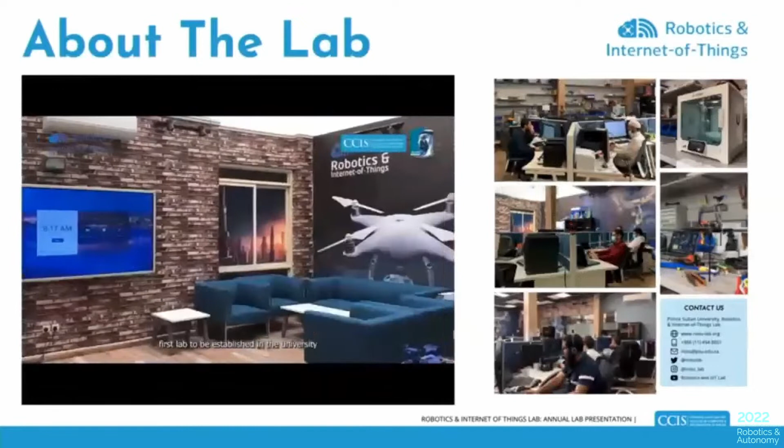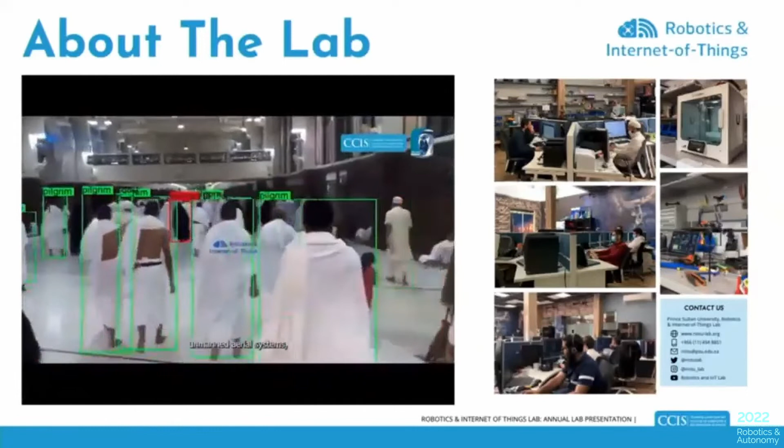So let me first give you a brief overview about the Robotics and Internet of Things Research Lab. The RIOTU Lab is the first research lab established at Prince Sultan University and currently has 15 full-time researchers with different backgrounds in computer science, software engineering, electrical engineering, and mechanical engineering, working on multidisciplinary areas including artificial intelligence, drones, mobile robots, Internet of Things applications, and emerging technologies.

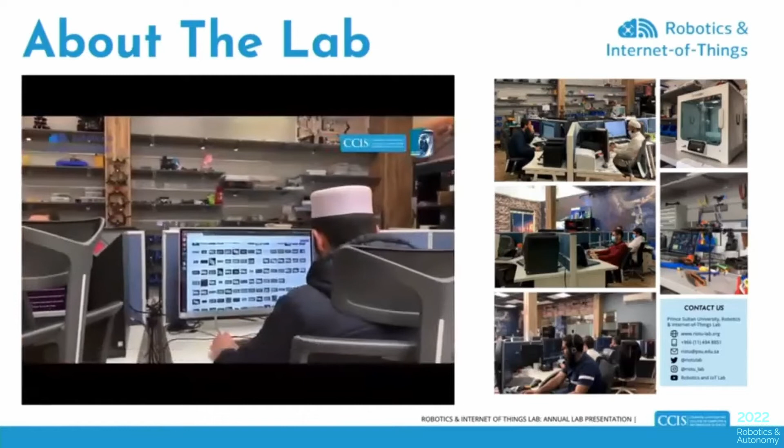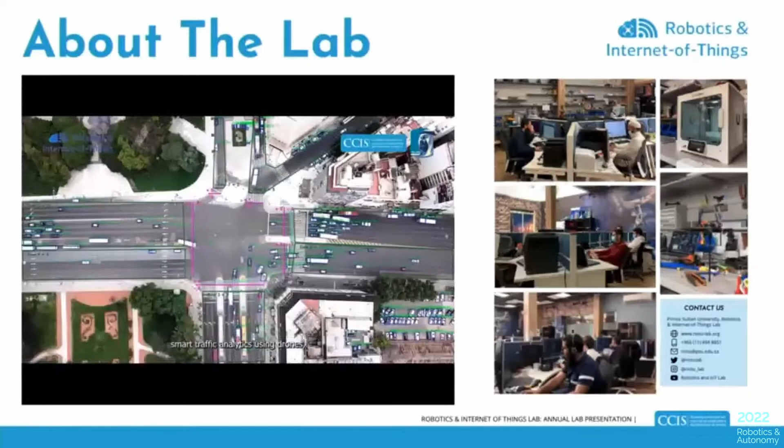The lab focuses both on academic research and also innovation. The research lab has contributed to several innovation projects, including the development of a drone delivery system, face recognition platform, vehicle identification and license plate recognition, telecommunication tower inspection, and others, which we will discuss in this presentation.

In this first part of the presentation, I will make an overview of the different applications that we have developed in the Robotics and Internet of Things Lab. Let me get started with the aerial survey applications.

As you can see from these slides, the global aerial imaging market size has been increasing since 2017, and it's forecasted that it will reach $4,125 million by the end of 2025. This makes a compound annual growth rate of 14% every year.

Here on the right side, you can see the distribution of the global aerial imaging market by drone platforms, as of 2017. You can see that fixed-wing aircraft are taking the largest share here, and in this case they will use vertical cameras. The second largest platform for aerial images are UAVs and drones, which are multi-rotor systems, with 45.7%. We also have helicopters with a small share here in green, and other types of platforms in red.

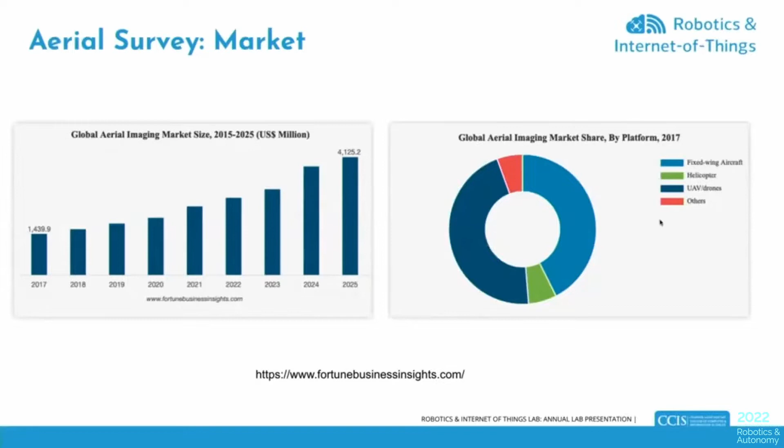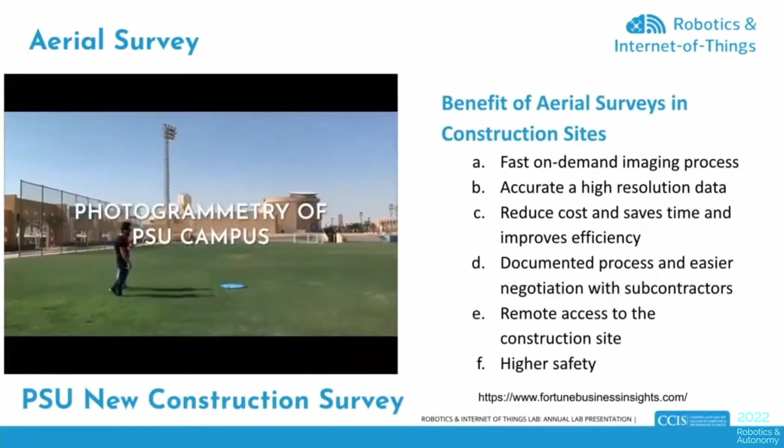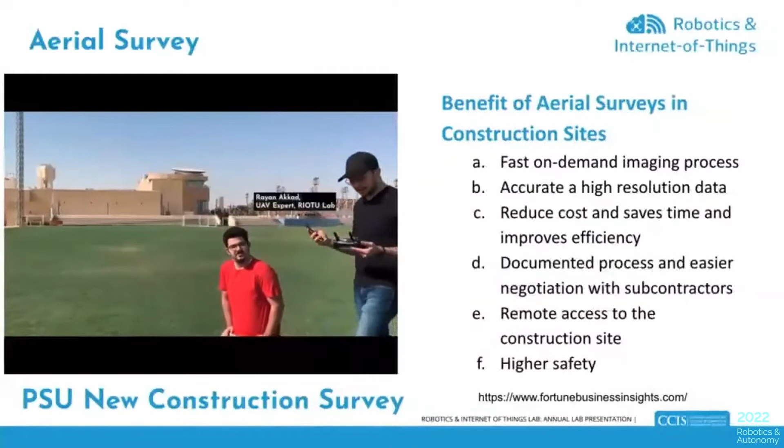So here in this slide, I'm going to take you through the different benefits of aerial surveys in construction sites. First, it provides a fast on-demand imaging process, so you can take a drone and collect images at any time for any area of interest. It provides accurate and high-resolution data because you can fly a drone at lower altitudes as compared, for example, to satellite images. It helps in reducing costs, saving time, and improving efficiency.

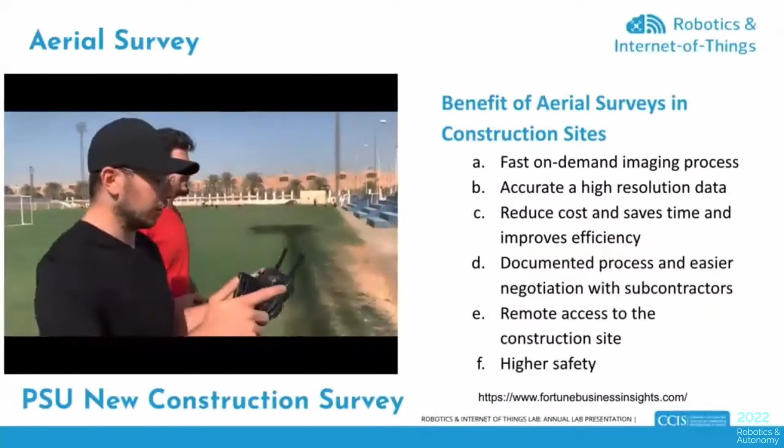For example, in this mission that we did to develop the 3D model and 2D model of the whole PSU campus, it just took 1 hour of flight to collect the data. And finally, you can get accurate, high-resolution data, as you can see here.

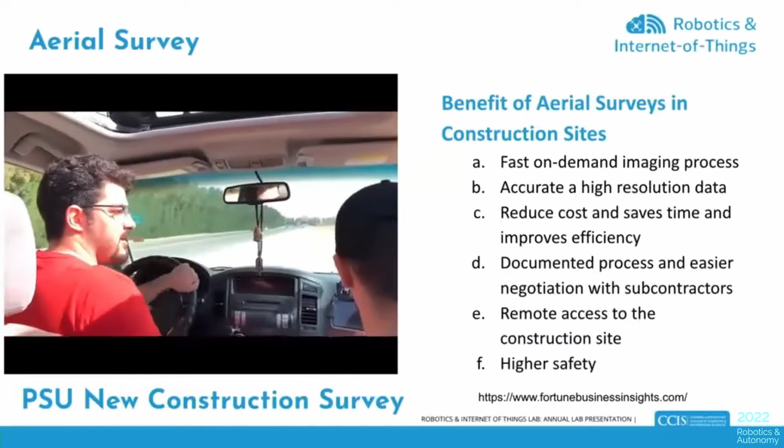Another benefit is that the whole process is documented, and it provides easier negotiation with subcontractors, especially if some companies would like to subcontract others to execute the aerial survey missions. It also provides remote access to the construction site, so you can visualize at any time the evolution of construction in a remote manner. Stakeholders do not need to move on site to check what is going on and what is the progress of the new construction building.

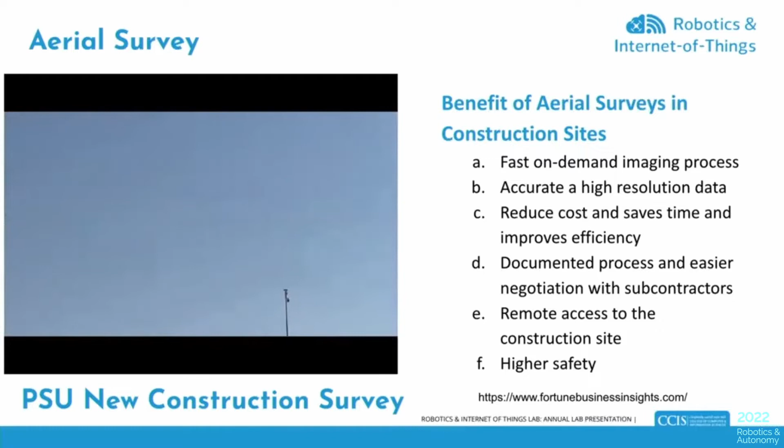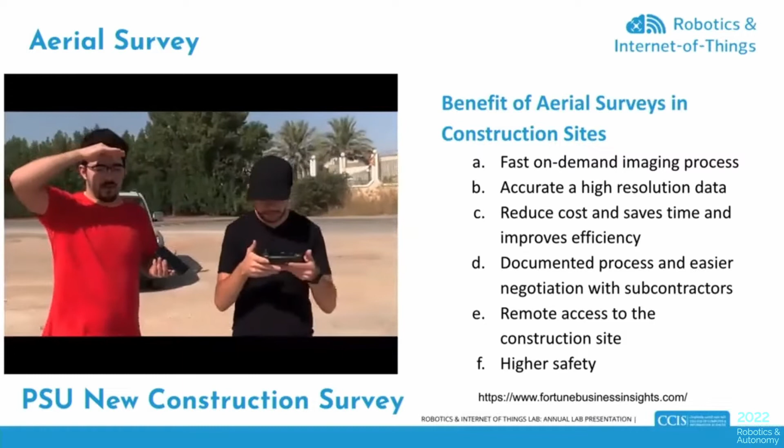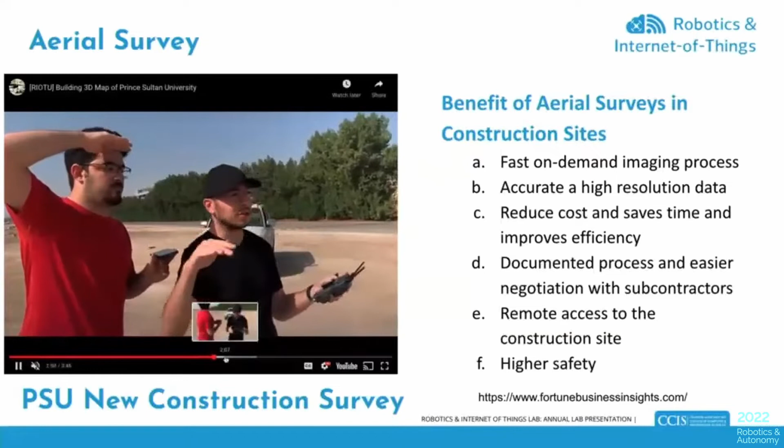In this mission, our drone pilot Ryan and Bilal Khawaf, one of the best graduate students very active in drones, conducted a survey of the whole PSU campus. We collected several images, a couple hundred depending on the resolution and accuracy required. The number of images collected depends from one mission to the other, and finally these images are processed by specialized software like Agisoft, Drone Deploy, or Pix4D.

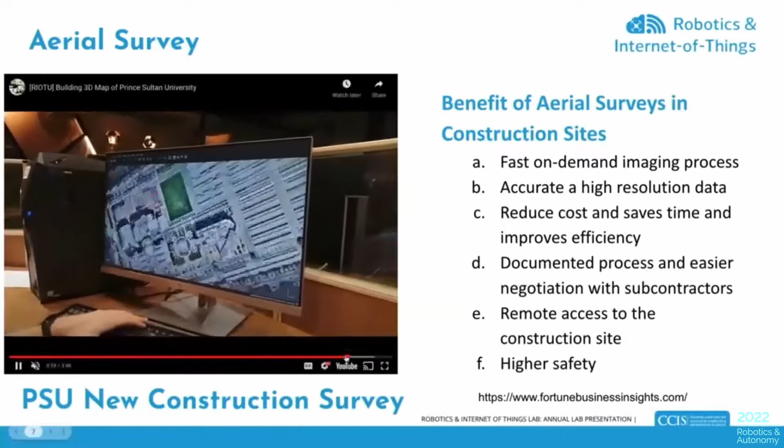This software generates high-resolution maps, either two-dimensional or three-dimensional models, as you can see here. This slide shows results from the survey mission of the new construction building, providing very high resolution. This 2D model was generated from an aerial survey mission, and in general the accuracy achieved can reach 2-3 centimeters horizontally and 5 to 6 centimeters vertically.

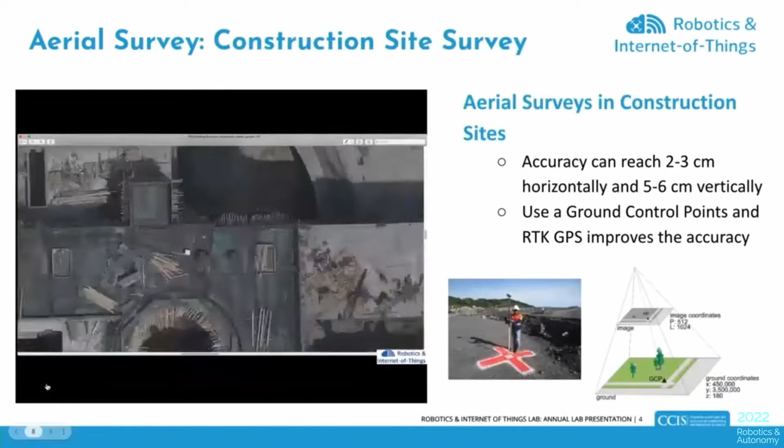So it's very high accuracy, and we can even increase the accuracy further. As you can see, we can see all the details, even small things on the ground, easily visible from this model. Now this is a three-dimensional model.

Using this three-dimensional model, we can do measurements of the surface or volume of a particular area. This can help, for example, in checking whether construction is compliant with the planning done in advance. The accuracy can be improved further by using ground control points, which are landmarks placed on the ground with known GPS locations.

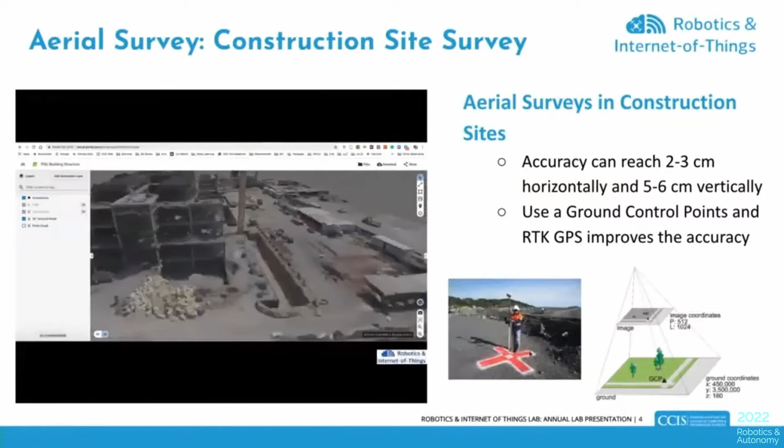We use RTK GPS to get the exact location with centimeter-level accuracy of these landmarks. These landmarks are later identified by the drone, and the software processing the images makes an alignment with these landmarks to improve the accuracy of the 3D model.

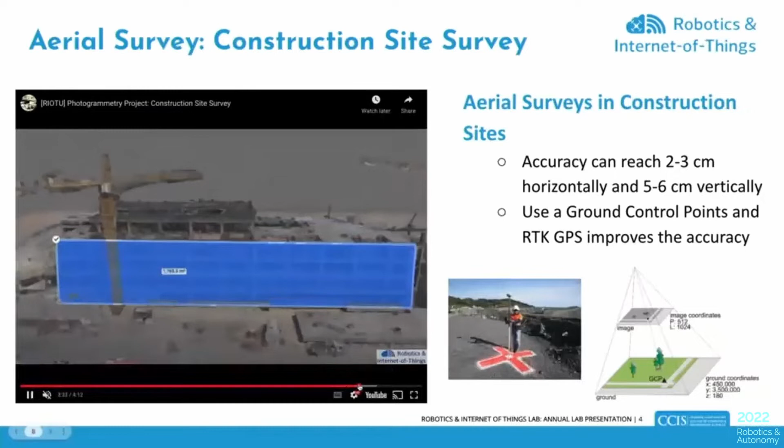As you can see here, you can have measurements for particular areas or segments. You can measure the area of a particular region, or another particular region, and you can also measure the volumes. So there are plenty of things we can do with aerial surveys in construction sites.

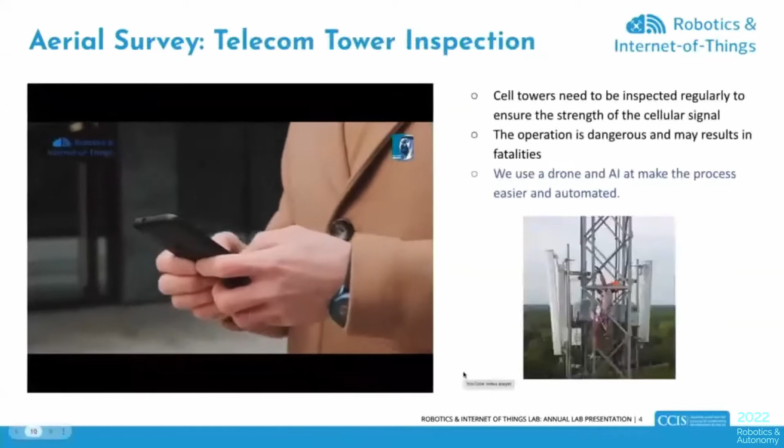Another achievement in the lab is using aerial surveys for telecommunication tower inspection. This work was done in collaboration with our partner in the US, the GM6 company. As you know, cell towers need to be inspected regularly to ensure the strength of cellular signals, and this operation is usually dangerous.

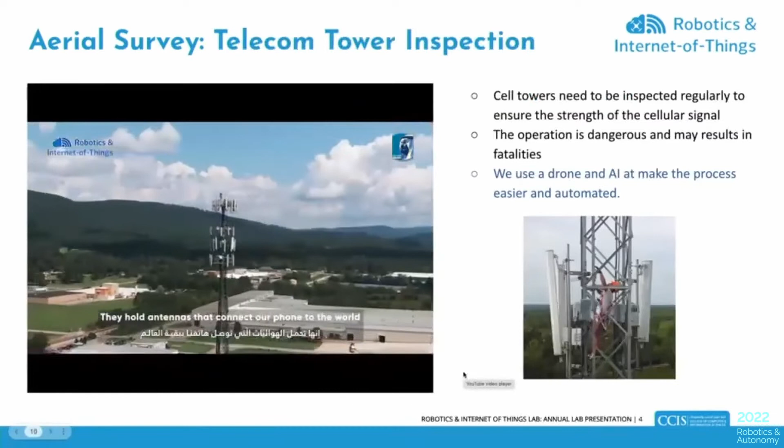Employees have to climb the whole telecommunication tower to check the current state of the antenna, whether there is inclination, any anomaly, or any defect. However, if we use a drone, the process can be much easier and more flexible. In the lab, we combined drones with AI to make the process easier and automated.

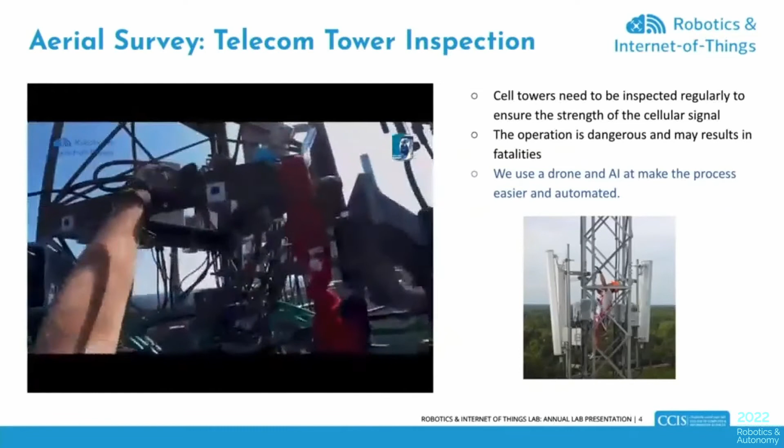Instead of this tedious and dangerous manual process, we developed a set of tools to make cell tower inspection much easier. We use a drone to get images from the cell tower, and software to provide a high-resolution model of the antenna. This is much more complicated than aerial survey for constructions, because construction sites have big surfaces, but telecommunication tower reconstruction is much more tedious.

Our AI solution is based on two steps. First, an instance segmentation model using deep learning automatically identifies the antennas, as you can see. Second, we use a reference antenna to measure if there is any transformation between the reference antenna and the detected antenna. This transformation can be an inclination with certain rotation or translation, and this is considered an anomaly that has to be fixed by telecommunication companies. This makes the process much easier and more automated.

Another work we have developed is using unmanned systems for transportation system analysis, in particular for traffic analysis.

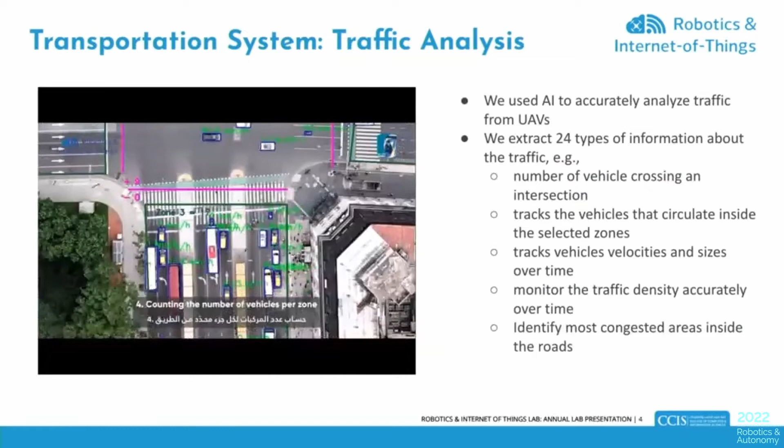We can estimate the speed of the vehicles, determine the number of vehicles crossing an intersection, and track the vehicles that circulate inside selected zones, tracking vehicle velocities and sizes over time. We can extract plenty of information from aerial images using AI techniques.

Here we are using object detection and tracking, and we save all the information into a log file, then we make thorough analysis of the different types of information you would like to extract.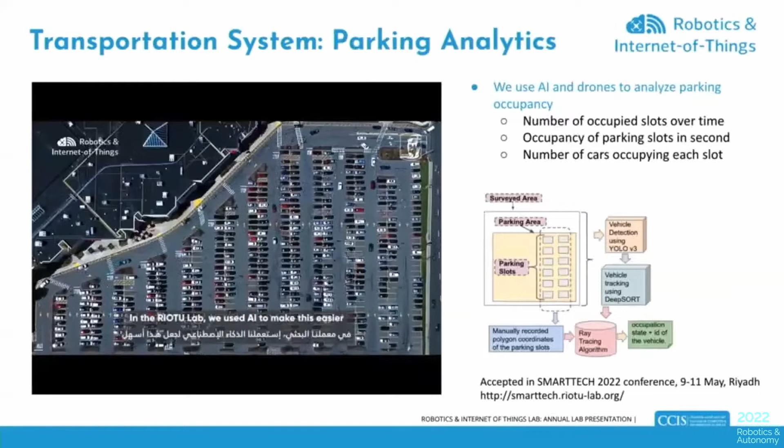Likewise, we have also applied aerial images with AI to parking analytics, and this is a paper recently accepted in the Smart Tech conference that we are organizing in Prince Sultan University, between 9 and 11 of May 2022. For more information, you can go to this link of the conference.

Here, the idea is to analyze the parking occupancy using AI and drones. We can extract, for example, the number of occupied slots over time. You can see how many slots are occupied, how many slots are empty, and all of this using just AI tracking techniques.

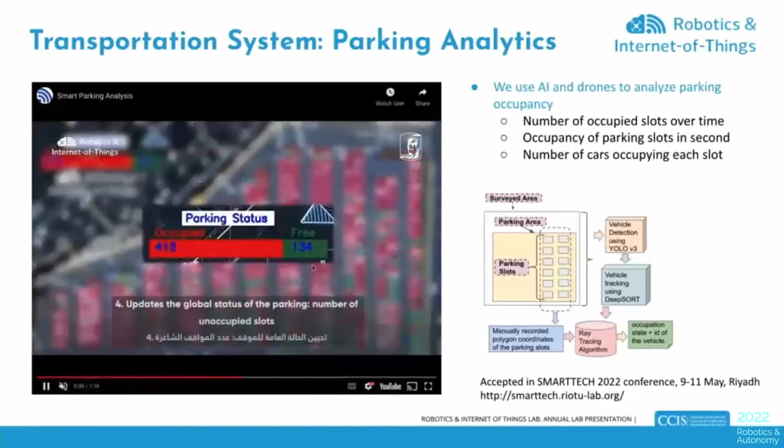We are going to log all the information extracted, and then we will analyze it using some data science techniques to extract the number of cars occupying every slot, the occupancy of parking slots in seconds, and the number of occupied slots over time.

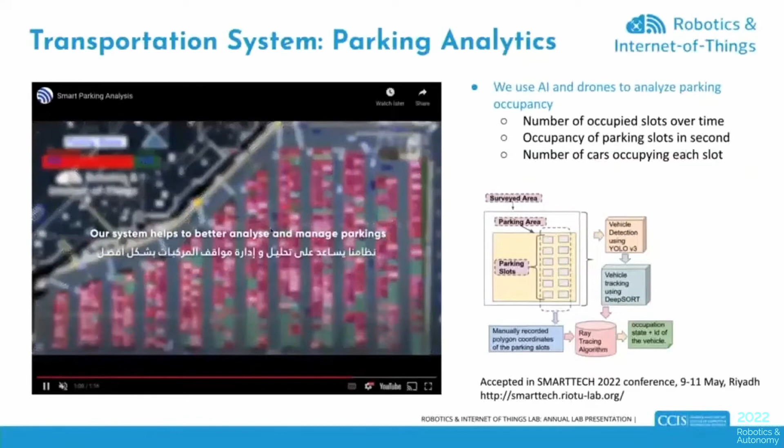In this demo, we have used YOLO version 3 and DeepSORT for vehicle tracking. For more information, you can refer to our paper that will appear in Smart Tech 2022.

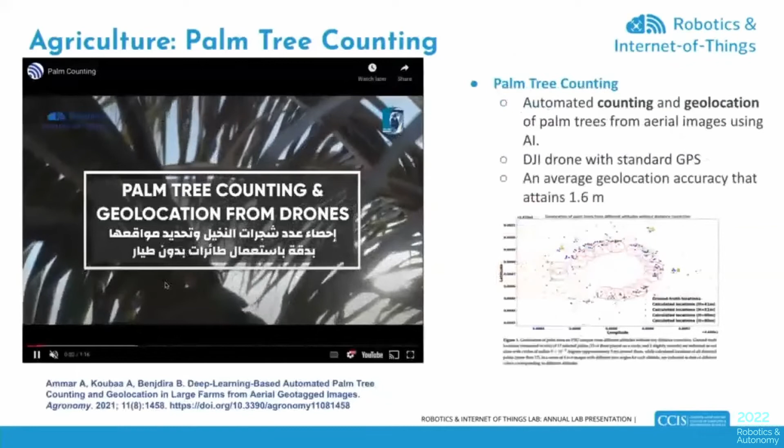Another work that we have done is applied to the agriculture sector, where we aim to count and localize palm trees from aerial images. As you can see here, we can make an automatic detection of palm trees, and not only detection, but also geolocation.

Geolocation here is a kind of complex process, because as you know, the accuracy of GPS devices can go up to 5 meters, and localizing the palm at around 5 meters would not be efficient.

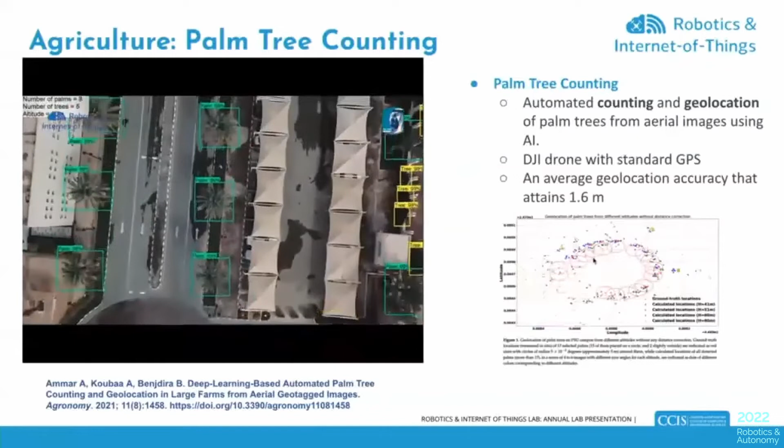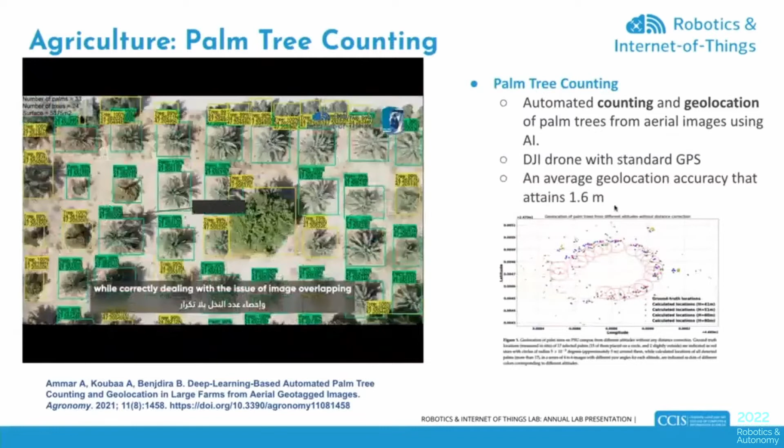So here we have developed a technique to combine multiple images that we collect, generate several estimated points, and then make an average geolocation. We have reached an average geolocation accuracy of 1.6 meters, so the average error for locating a particular palm will be just 1.6 meters, which is acceptable because the distance between palms can reach up to 10 meters.

One of our latest achievements is that we have developed a drone for delivery, and we've made different demos for the Ministry of Health in 2021 and also for Saudi Post.

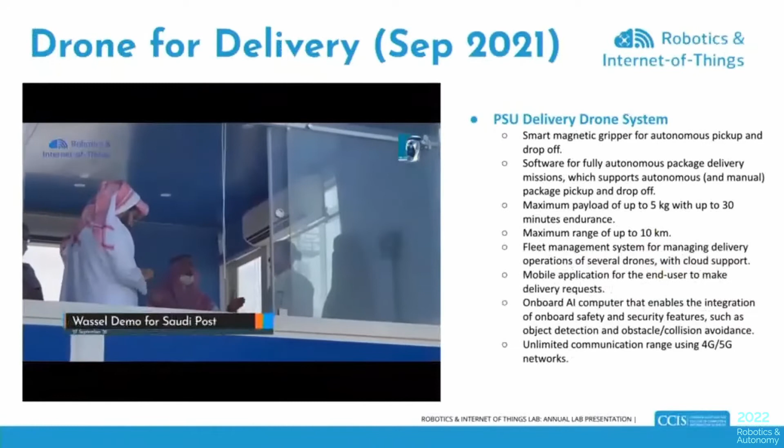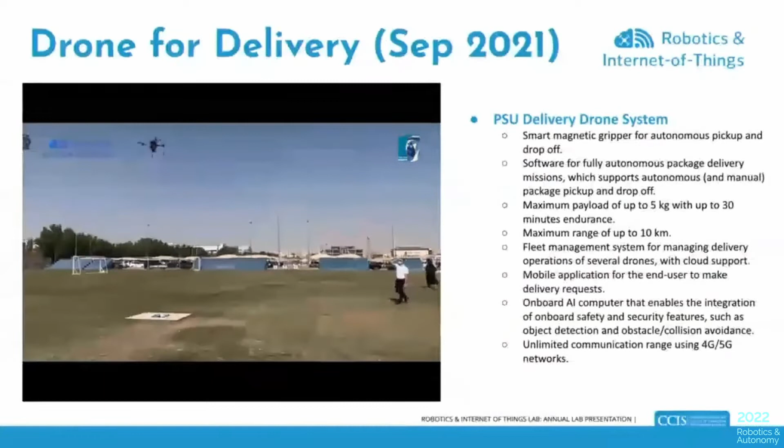The PSU delivery drone system provides a fully autonomous drone that is able to pick up a package from a particular location and deliver it to another location in a fully autonomous manner, as you can see in this video demo. The features of our PSU delivery drone system include a smart magnetic gripper for autonomous pickup and drop off.

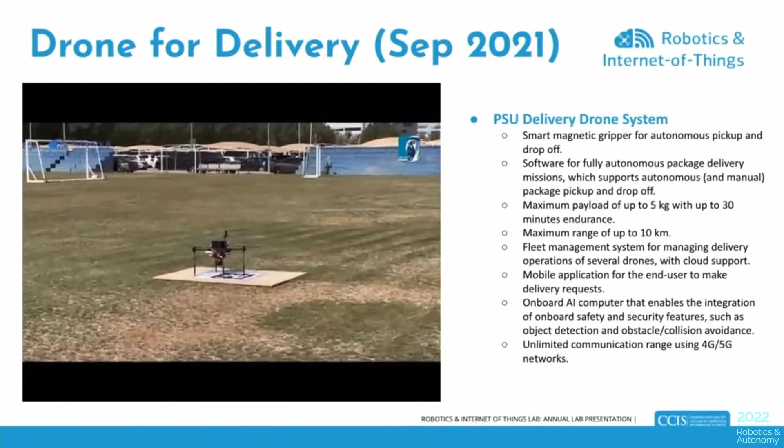We've developed software for fully autonomous package delivery and handling delivery missions, which supports autonomous package pickup and drop off. We have a maximum payload of up to 5 kilograms, but currently we are around 2 kilograms, with up to 30 minutes of endurance and a maximum range of up to 10 kilometers.

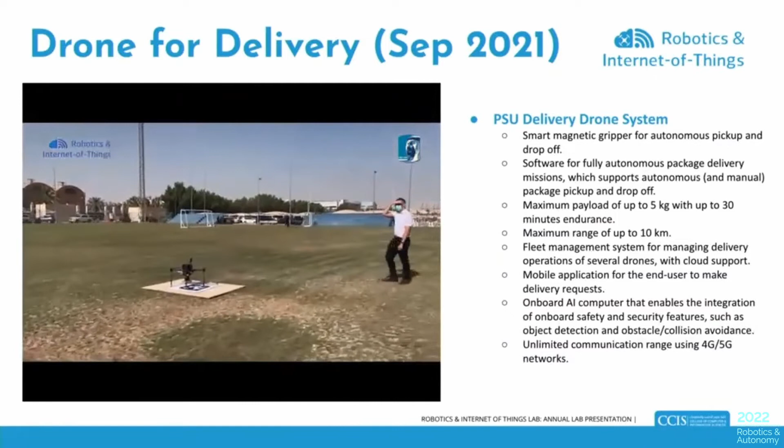We have developed a fleet management system for managing the delivery operations of several drones with cloud support as well. The user can use a mobile app to place a mission to the cloud, the mission will be validated, and finally the drone will start execution of the mission.

We use an onboard AI computer to enable the integration of onboard safety and security features such as object detection and obstacle avoidance.

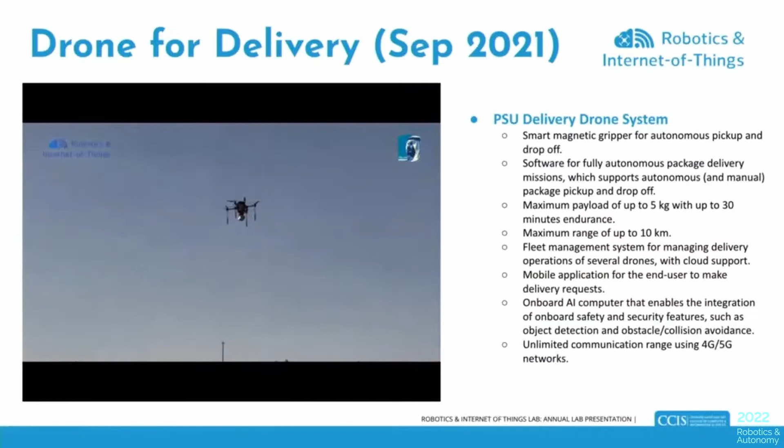The good thing in our system is that we use unlimited range. Unlike other systems that are based on telemetry, which is always limited in range, in our case we use the 4G and 5G networks in order to communicate with the drone at any time.

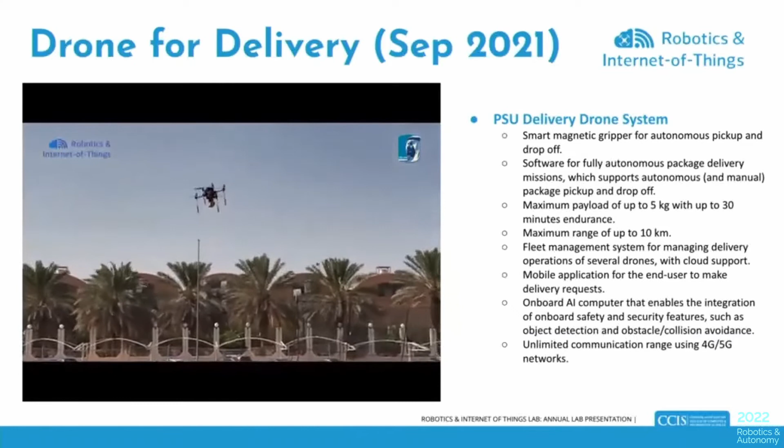In this demo, we have also developed precision landing. You can see there is wind on the day of the demo, but the drone was able to land safely and accurately on the landing pad.

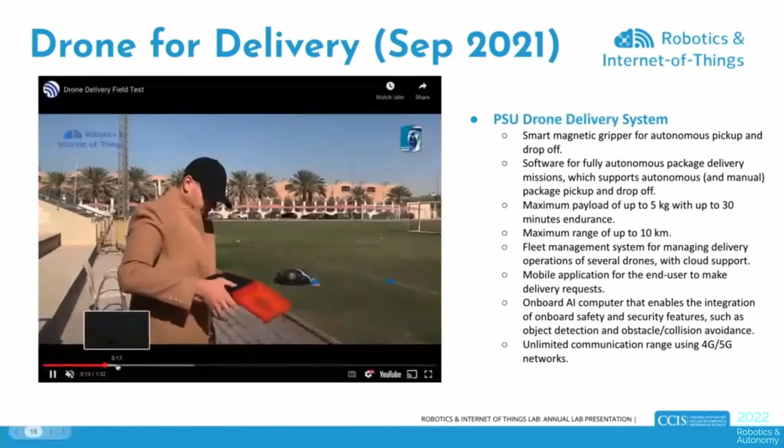This is another demo that we have developed for the Ministry of Health for the transportation of blood samples. With blood samples, we also need to maintain temperature, which adds an additional challenge.

In this part, I'm going to present the challenges facing UAVs and their deployment. Let me first start by providing the challenges when you want to design drone hardware. First of all, we have to identify what the drone requirements are.

The first thing we think about is endurance, how long a drone can fly. Usually we want the drone to fly as long as possible, but this is governed by the battery capacity, by the payload of the system being carried, and by the weight of the drone itself. There are many parameters that affect whether the requirement can be achieved.

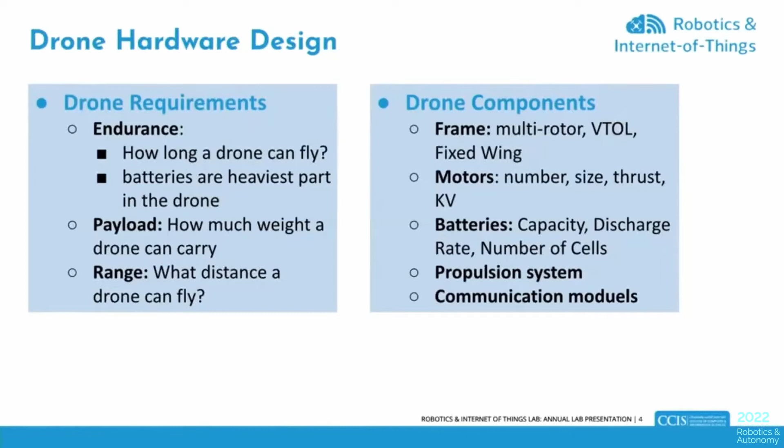Also the payload, how much weight we would like to carry. So there is a balance to make between endurance, payload, and the range the drone has to fly - what distance can it cover. This depends on the endurance, and also on the speed of the drone, which depends on the motors selected for that particular drone.

Let me give you some frame options. This is the Quad X configuration, a quadcopter, which has the advantage of being lighter weight than other configurations, simple in design, and energy efficient because it has only 4 motors. But this type of drone usually doesn't carry heavy payload, usually less than 1 kilogram, and it has limited endurance because we have to use a battery with lower capacity.

We can go to a bigger scale, the Hexa X configuration, which has 6 motors. It provides 50% more thrust because we have 2 additional motors compared to the quadcopter. It provides higher endurance because we can use bigger batteries, and it is more reliable due to redundancy - in the hexacopter, if one motor fails, the drone can still fly. However, in the Quad X configuration, if one motor fails, the drone is going to crash immediately.

Another type of drone is the octocopter, the Octo X configuration. It has 8 motors, so it is used for heavier payloads. This drone is safer than the other two because it can tolerate losing the power of 2 non-neighboring motors. But here the limitation is that with more motors, you have higher energy consumption, higher weight, and higher cost. This is compensated by the fact that we can use more batteries.

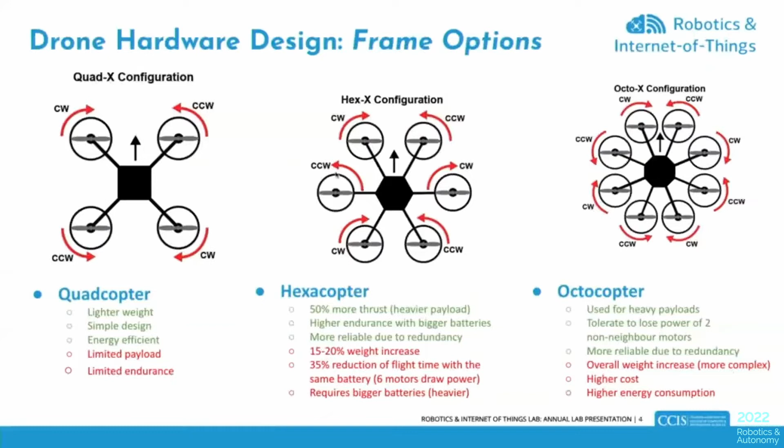So what would be here the flight time of this drone? It is estimated to be 17.1 minutes only. This is the estimated flight time with 20% battery capacity left for landing, because we need to have at least 20% in order for the drone to come back and land at home.

If we change just the payload from 5 kilograms to 10 kilograms, this configuration allows a payload of 10 kilograms, but this will affect the flight time. So we go from 17 minutes to only 12 minutes.

Now, if we want to increase the capacity of the batteries in this configuration, all other parameters are the same, and we use 16,000 capacity and 4 batteries. So the total weight of the batteries will increase to 7.93 kilograms. Adding capacity will add weight. So what you earn from the extra capacity, you will lose from the additional payload. You have almost 3 kilograms of extra payload, which will be more burden on the drone when flying.

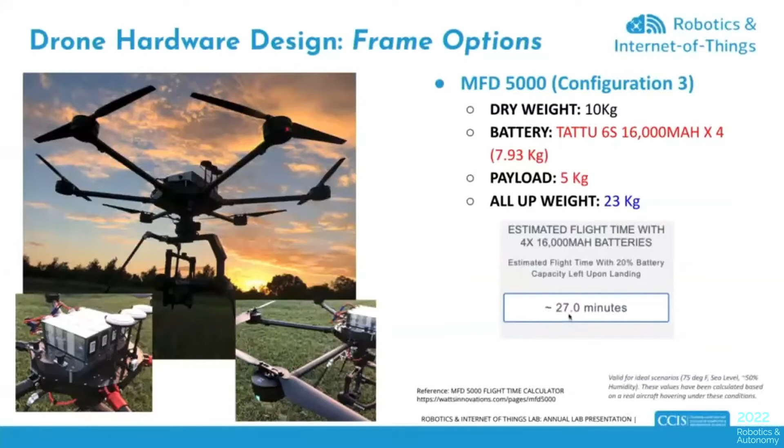So this configuration still is able to jump from 17 minutes to 27 minutes because we use double the capacity of the batteries. In this diagram, the source is the MFD 5000 page, where it allows you to set different types of payloads and configurations, and then it will estimate the flight time. Of course, when we increase the capacity, the flight time will increase for the same payload.

For example, if we take a payload of 5 kilograms, we can jump from 17 to 27. And of course, if you use different types of batteries, you can see that you have also extra flight time. So this is the relation between the payload, the flight time, and the battery capacity.

And you can see here for 10 kilograms, the maximum that you can get is only 20 minutes. And if you don't use any payload, as you can see here, with zero payload, for example with the 16,000 capacity, the drone can fly at 36.5 minutes.

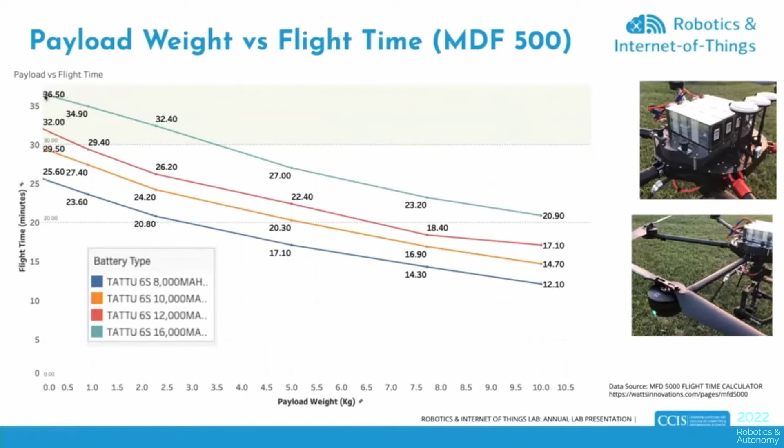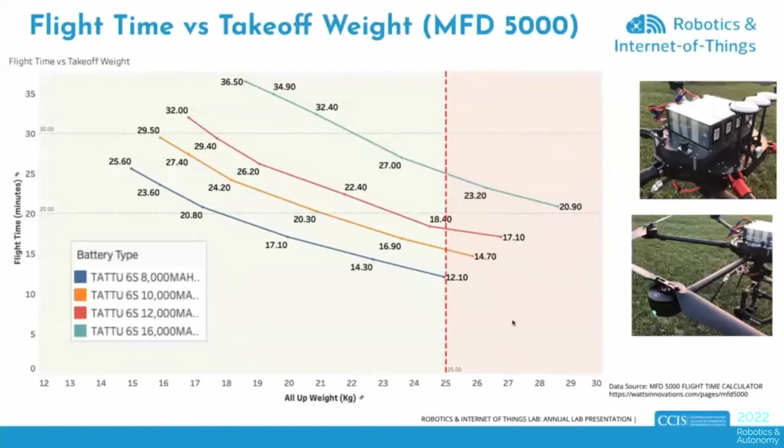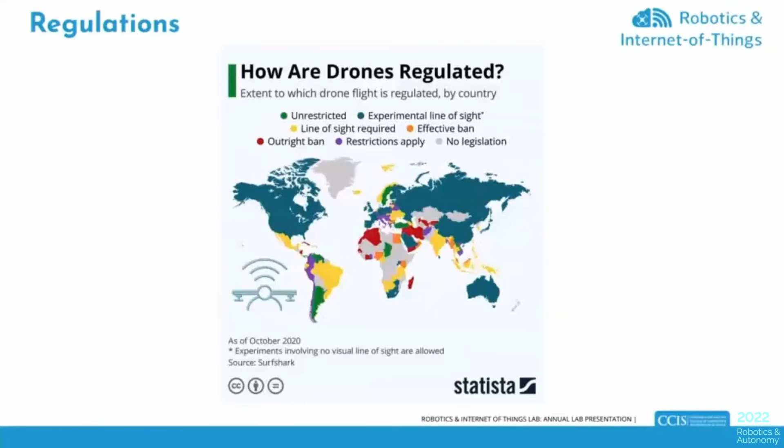This is why it is very important when you drive an international drone business and operate drones over the world, it is necessary to understand that there is no one-size-fits-all regulation in the different countries, and that drone design and operation development must clearly be aware of the country-specific regulations.

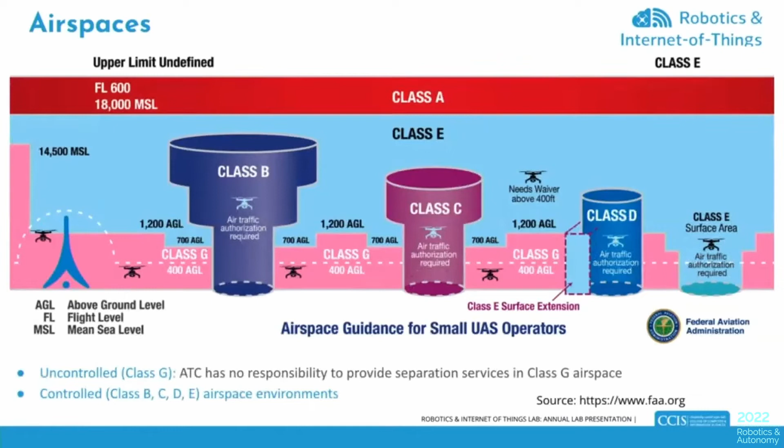The deployment of UAVs is expected to exceed manned traffic, and what makes it even more challenging is that it will share a much smaller portion of the airspace. Looking at the airspace classes, only Class G is uncontrolled; all other airspaces are controlled and used by manned traffic, requiring ATC authorization. UAVs are expected to mainly operate in the uncontrolled Class G airspace, and can also operate in other classes with prior and extra authorization.

An additional challenge is that a large portion of unmanned aerial systems will operate beyond visual line of sight, given that these drones will be fully autonomous. For example, for package delivery the drone will be fully autonomous, as we've seen in the previous demo. This is why a UTM is a must to allow for the deployment of UAVs.

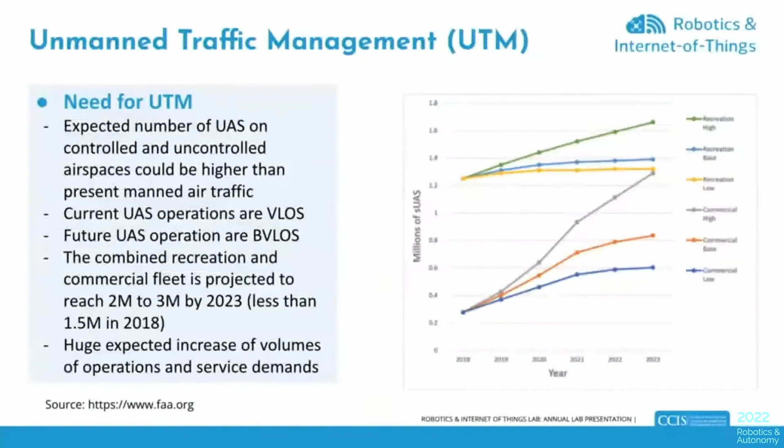The UAS, when they need any information, will not interact directly with the authority. Instead they will interact with a UAS service supplier, which we call USS. This USS service supplier is delegated by the authority, which is the FAA in the US, and will provide constraints and requests for information to the UAS, so that later on they provide it to the operator.

The USS also mediates not only between the operator and the authority, but also with public safety and other public agencies. They can take extra information from supplemental data service providers, such as weather conditions, terrain, surveillance, performance, and so on. This is the general architecture of the unmanned traffic management system designed by the FAA.

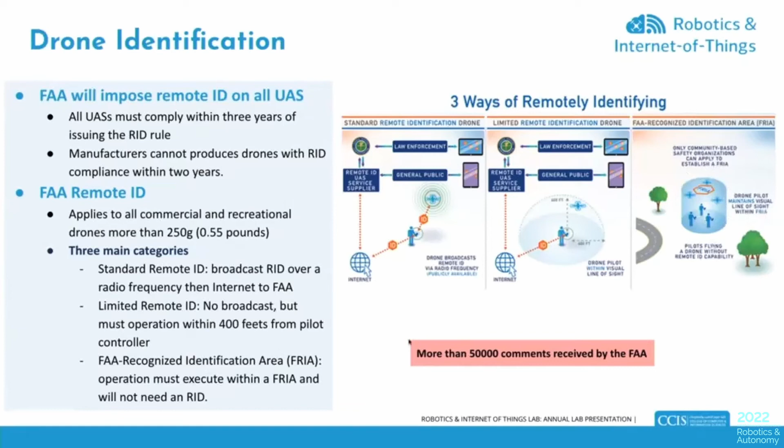Another approach we developed in the Robotics and Internet of Things lab to identify drones uses the Roslink protocol, which we started developing since 2017. Roslink allows communication between robots and drones over the internet, and we recently achieved a very advanced implementation of this protocol with advanced security features. Roslink uses a system ID to identify a drone, and we use 4G/5G cellular networks to remain in communication with the UTM in real time.

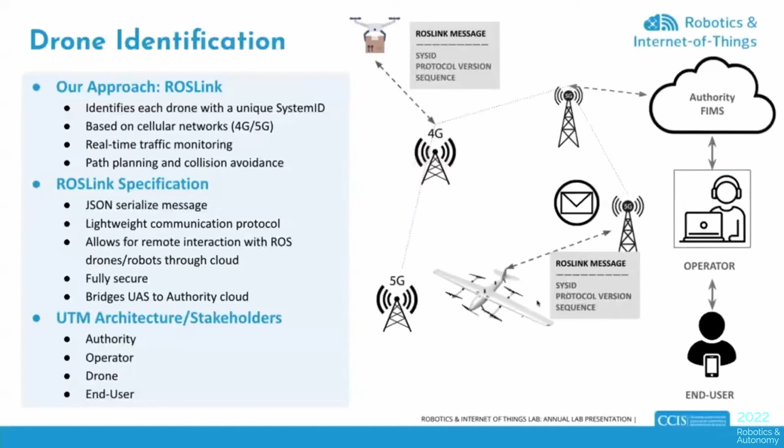Other challenges facing drone deployment include the type of communication, which can be point-to-point network or satellite communication. Cybersecurity is another very important issue facing beyond visual line of sight deployment, which has yet to fully ensure authentication, confidentiality, availability, and integrity. One more challenge is designing drones with multi-package capabilities, since single package delivery would not be efficient or cost-effective.

There are even more challenges and opportunities to discuss, but considering the time limitation, I hope what was presented provided some insights about these challenges. Thank you for your attention.